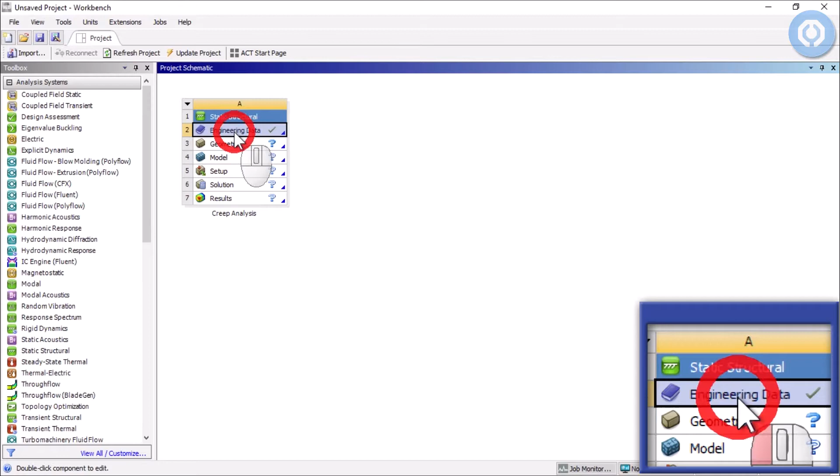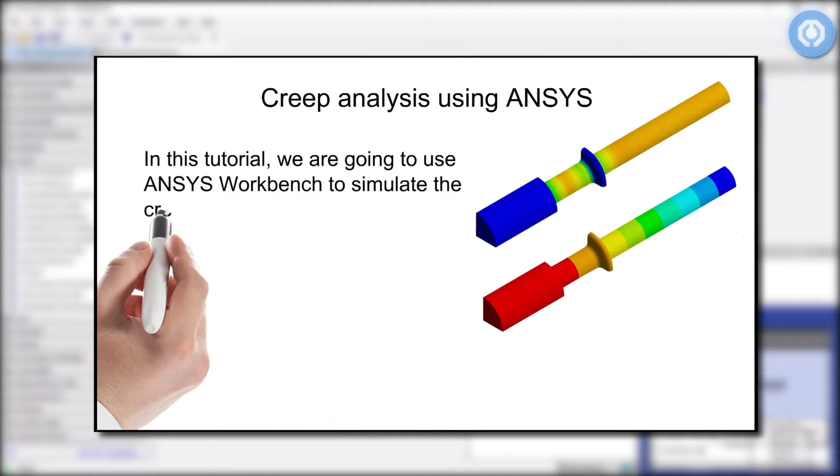Creep analysis using ANSYS. In this tutorial, we are going to use ANSYS Workbench to simulate the creep deformation of aluminium alloy 6061 T6 under constant stress and temperature.

Thermal and mechanical properties of this alloy are presented.

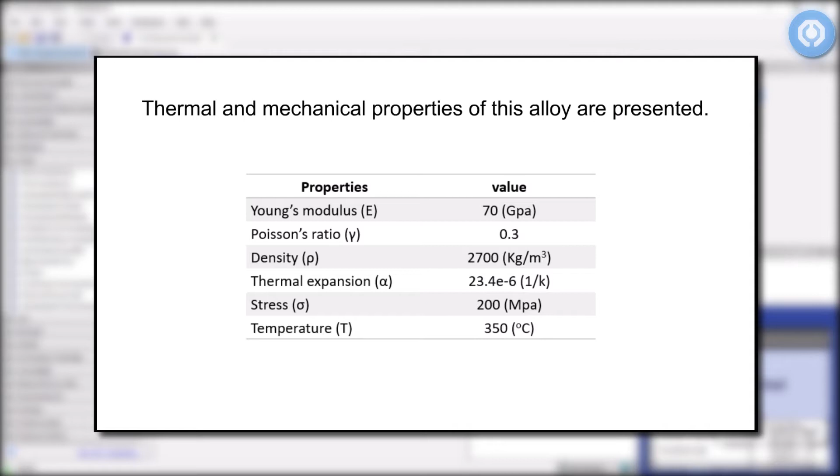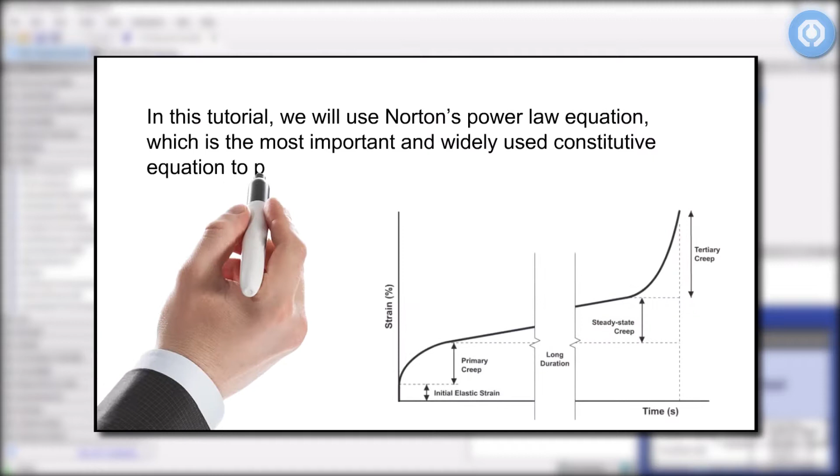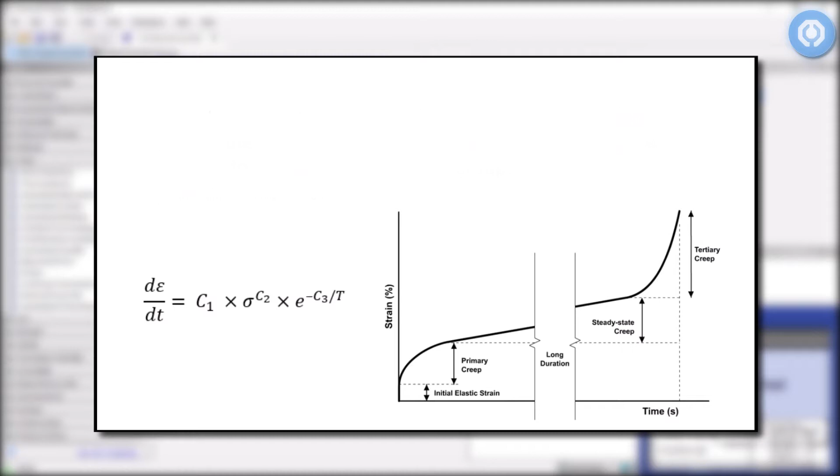In this tutorial, we will use Norton's power law equation, which is the most important and widely used constitutive equation to predict the secondary creep. It can be written as follows, where C1, C2 and C3 are material constants.

The mentioned parameters are based on the modeling and creep strain analysis of aluminium alloy 6061 T6 by Creep Tensile Test article, which is published in Materials Today journal.

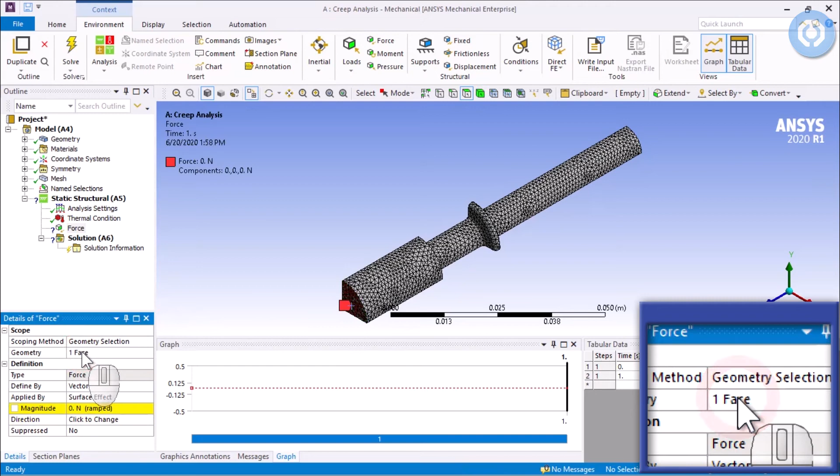We are going to impose 200 megapascal stress on the creep specimen. The value of the imposed force is calculated as follows. Since we are using a 1/4 symmetric model, we need a 1/4 coefficient in our calculations.

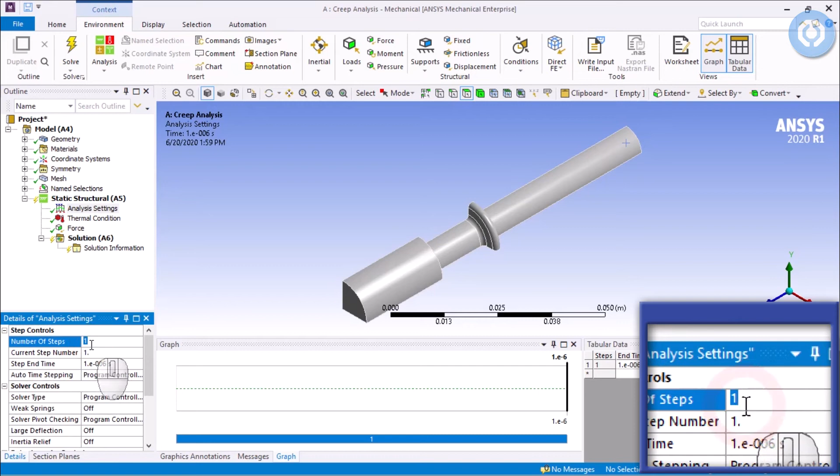The creep strain calculation can be turned on or off during an analysis. This is useful to establish initial conditions.

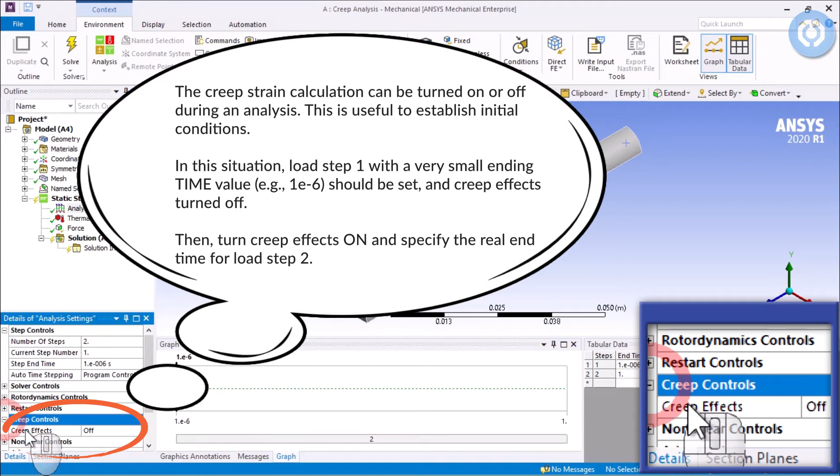In this situation, load step 1 with a very small ending time value should be set, and creep effects turned off. Then, turn creep effects on and specify the real end time for load step 2.

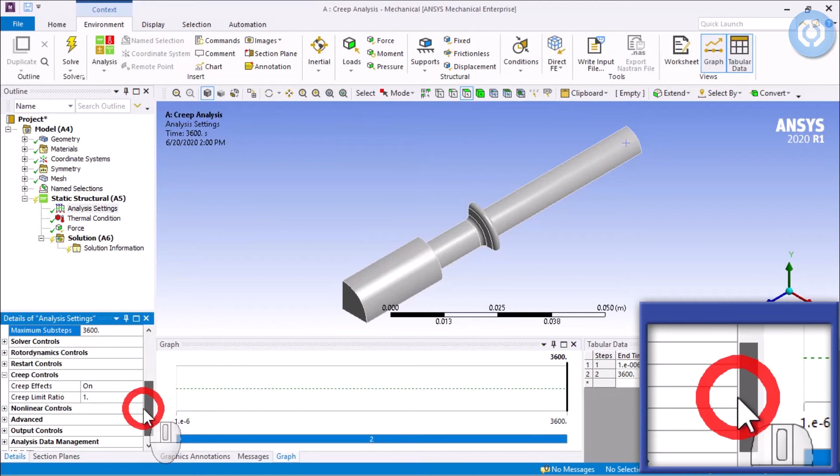Because creep is a path-dependent phenomenon, it is important to ensure that the response is adequately captured. One measure of this which the solver uses is the creep strain ratio.

Here, delta epsilon SR is the equivalent creep strain increment, and epsilon net is the modified equivalent elastic strain. Creep limit ratio is the maximum allowable limit to the creep strain ratio.

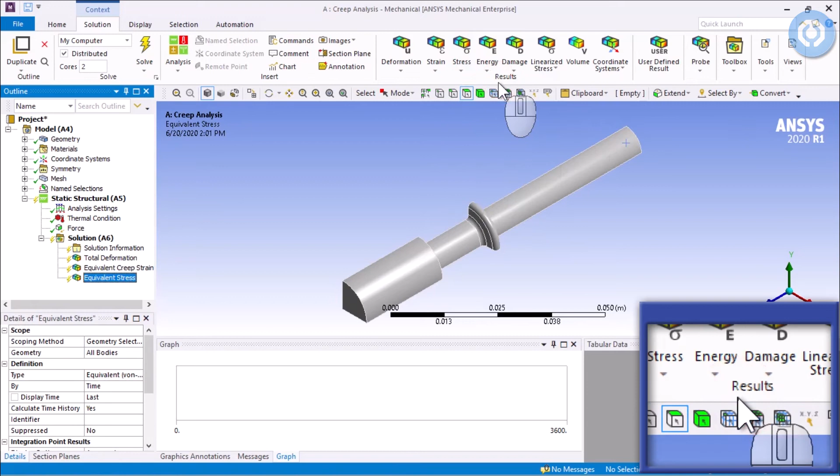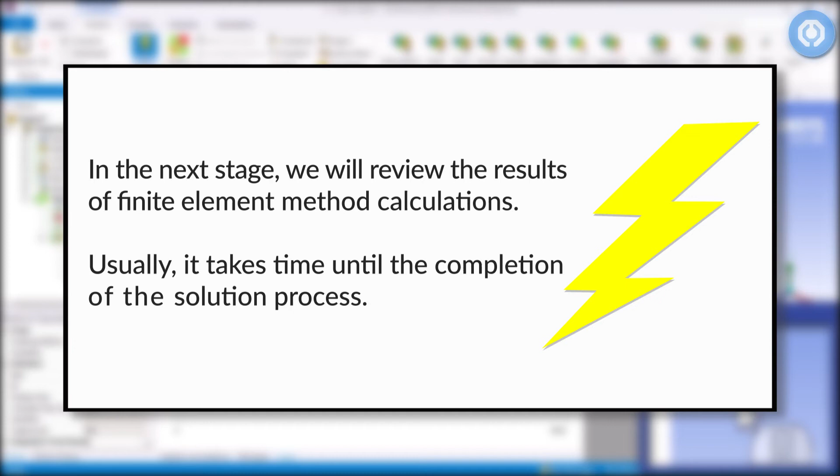In the next stage, we will review the results of finite element method calculations. Usually, it takes time until the completion of the solution process.